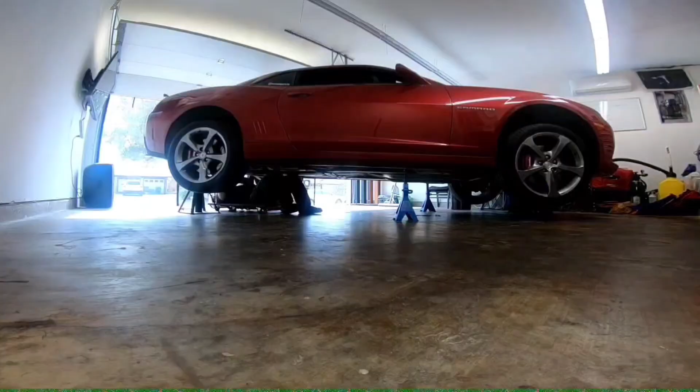They sit there being judgmental because you're trying things, and they just want you to settle and do the right thing. So get a good job, don't slack off.

They sit there being judgmental because you're trying things, and they just want you to...

What's up, guys? So I wasn't going to include this part in the video, but I just had to based on what I found. So right off the bat, I will say my micrometer here does measure in increments of 1/10,000th of an inch. The bore dial gauge does not. It measures in increments of 5/10,000ths of an inch.

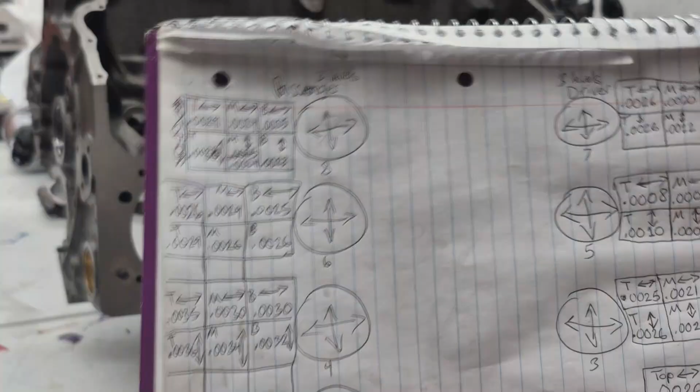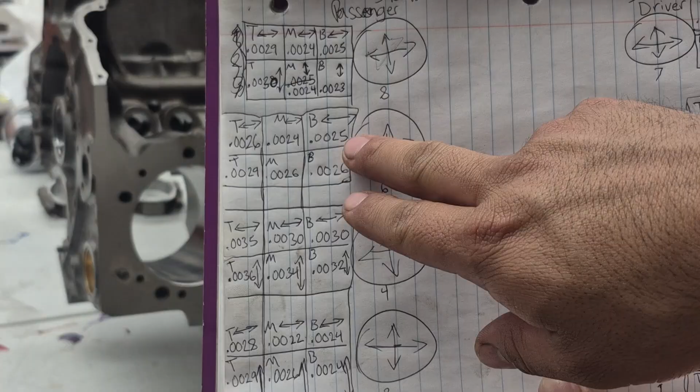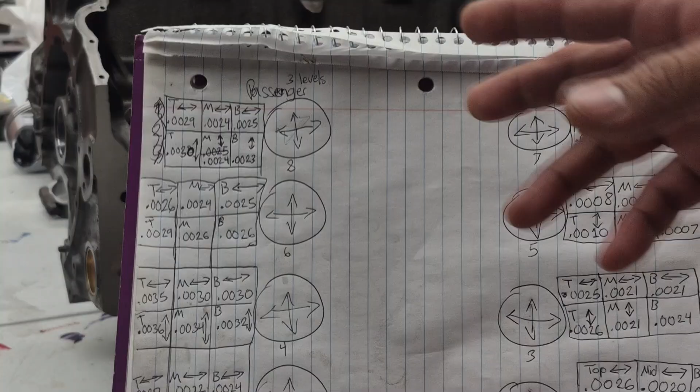And these readings that I have on here, the reason they're not in increments of 5/10,000ths is because I just went off my eyesight based on where the needle was on the gauge. Technically, based on that gauge, I should have just rounded up to the nearest one, but I decided to do it this way just to have kind of an estimate in my head. I'm limited by the capabilities of my equipment, but this is pretty close. I just wanted to see if everything was around where it should be.

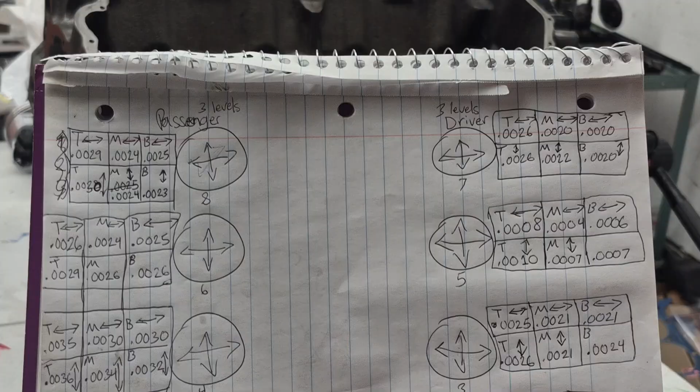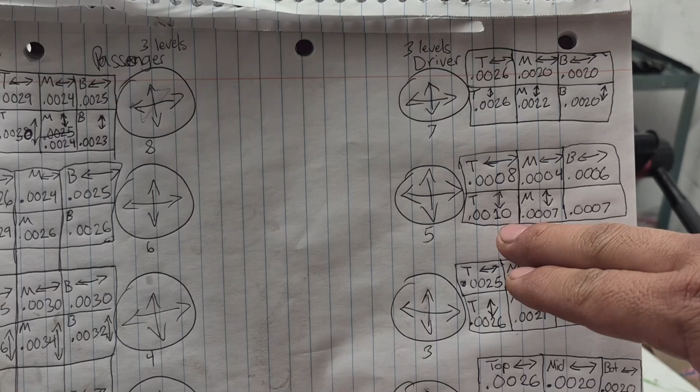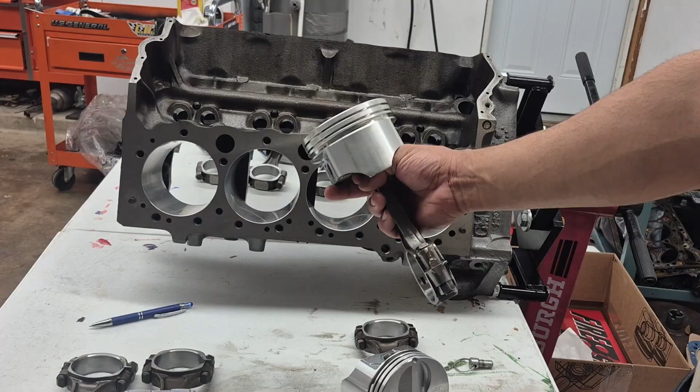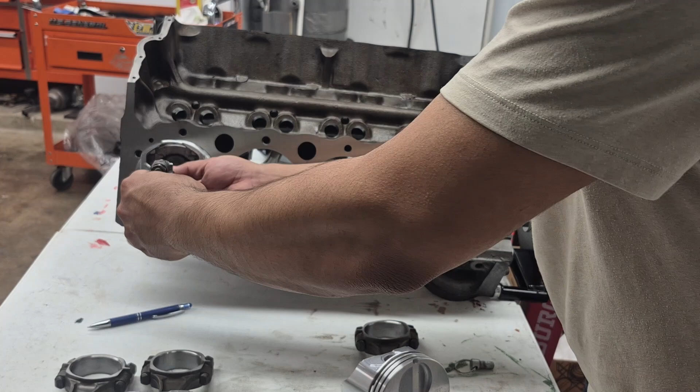And what I've discovered is that cylinder number 5, these are the readings here. It is very tight. I mean, if I rounded all these up, technically it's just 1,000th, and that is on the tighter side. So if I slide this piston into any of the other cylinder bores, which I've already done, but I'll go ahead and show you on these at least. If I slide that in there, it moves fairly easy, right? If I put it in this one, it moves fairly easy. And I am trying to keep a hold of the rod so it's not leaning to one side or another. I'm trying to keep it neutral. So I'm just showing you all the other ones.

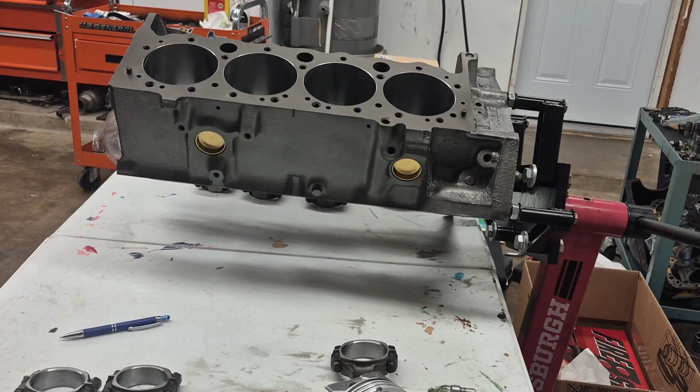Right? Now watch when I put it in this one. I'm trying to do the exact same thing, but I can feel it rubbing. It's getting stuck and rubbing, and I am doing the exact same thing as the other ones. So that right there is a dead giveaway. So let me move this back around, because I don't know if I'll get it on the camera here. I think it will actually. It already made a little scuff. You can kind of tell right here in the middle. I see it better in person, obviously. You know what? I'm just gonna take y'all off of here so I can show y'all.

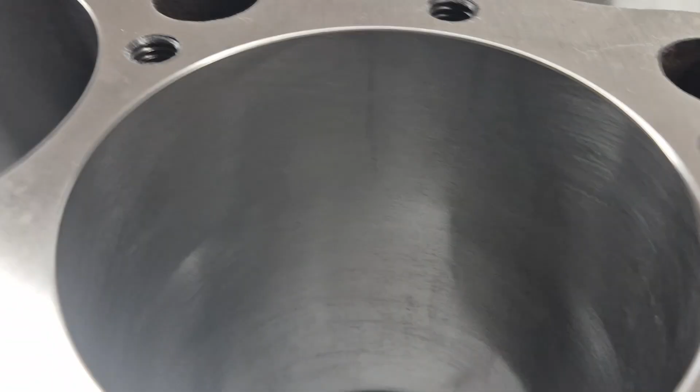Okay, you see that? It did that just with me sliding it up and down. So again, I'll do it one more time. I'll try to get a better, closer view towards it.

Nope, hold on, Pastor Rob. I'm gonna have to call you back.

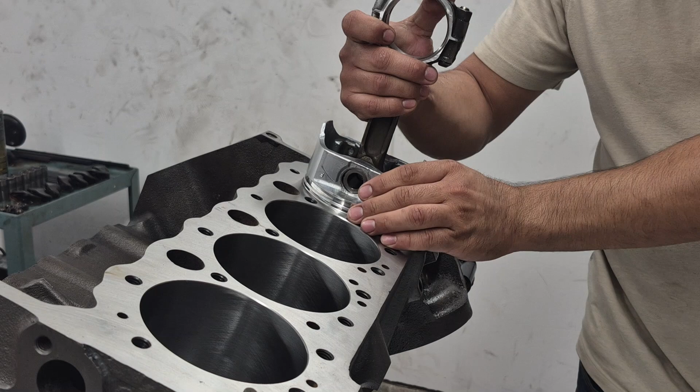As I did before, I'll show y'all once again. So again, I'm keeping the rod pretty neutral, pretty centered, so that this can just move in there freely. I'll show you on this one. Okay, show you on this one. Okay, now let me show you the problem one. I cannot do it as fast as the other one because it keeps binding on me on certain spots. And I am trying to center it no different than the other ones, and I cannot move it that fast. It's just binding on certain spots or rubbing.

And to state the obvious, I did wipe these clean. There's no hairs or any contaminants that I can see from any light angle. And again, when I slide this in there and try to pull it up and down as fast as the other ones, I cannot. So anyhow, that's what I found with all of this. I am going to be taking this to the machine shop, and I don't know when. Tomorrow's my birthday, so pretty much tomorrow I'm not gonna take it. I'll probably take it some other time, but that is definitely an issue that worries me. I gotta still check the rod clearances and the mains. So there's plenty still to do, to measure.